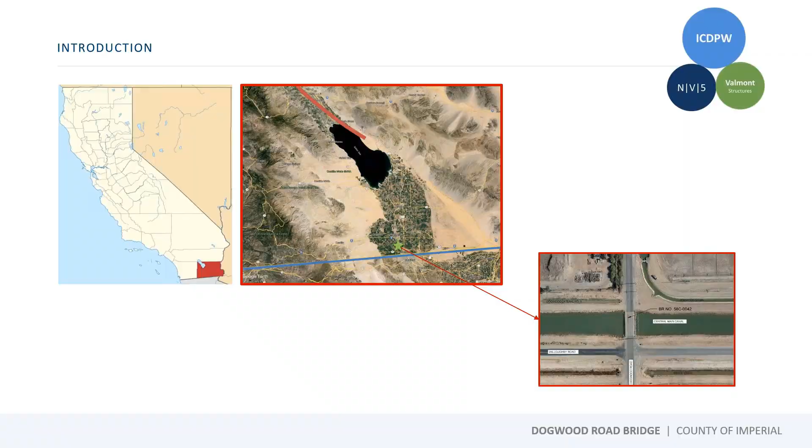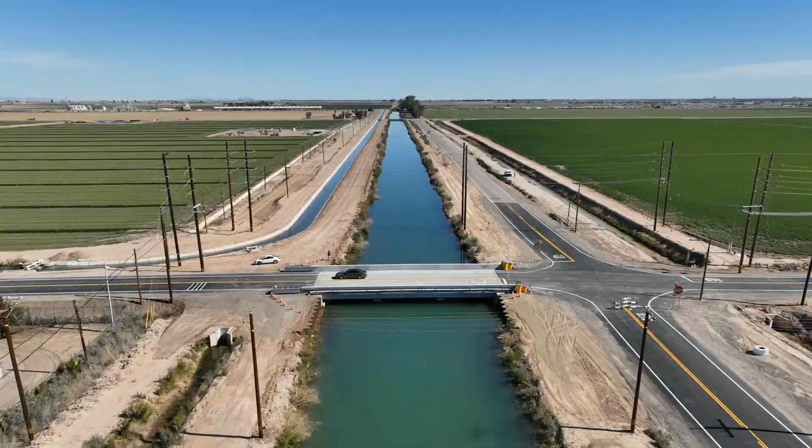You can also see a red line that bisects diagonally through our county. We actually sit at the very south end of the San Andreas Fault. We are known for our seismic activity here. An interesting fact is, I think basically 3 months after our bridge was constructed and opened, we actually had a 4.0 magnitude earthquake swarm. The epicenter was 2,000 feet just west of our bridge. So we do have a lot of dynamic activity that happens here.

Because we are a cultivated desert, we do have a lot of canal and drain systems. You can see in the photos attached, this bridge crosses one of our 4 main tributary canal systems that help cultivate our area. The canals never run dry. It's a 24/7 operation in terms of they're never taken out for maintenance reasons, and so this project requires us to work in very wet environments.

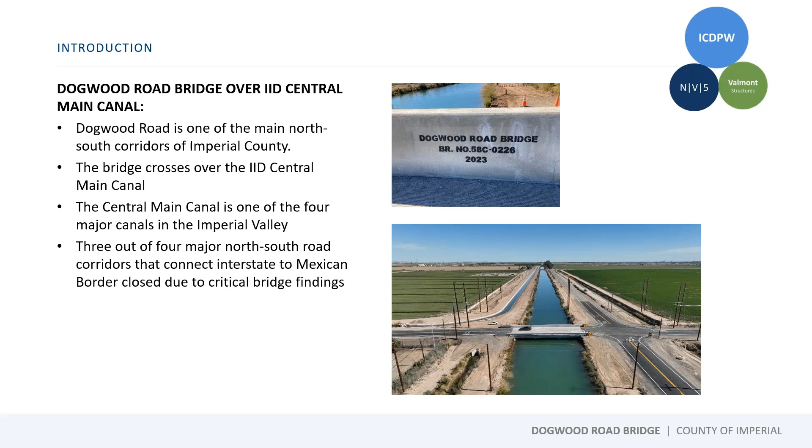The Dogwood Road corridor is a main north-south corridor that crosses the Central Main Canal. That corridor is key because it ties directly into the border with Mexico. Our project at the time was declared an emergency because 3 out of the 4 main corridors that transit to the border north-south through our county were actually closed because of bridge issues. 2 of them had critical findings at the time, and Dogwood Road was closed as well.

The issues for closure had to do with ongoing subsidence. You can see in this photo the old bridge - this area was settling, and Derek will get into that in a little more detail. Because of the settling that was occurring, because of the water that began overtopping the deck, we declared a local state of emergency and closed the bridge. There was a significant erosion issue too that was occurring at the abutments.

Some of the complicating factors around this particular project had to do with a very high density of utilities of different types. There was a gas line actually attached underneath the bridge - a high pressure gas line that served one of our cities. Overhead power lines, telecommunication, as well as the drains and canals. The closure of Dogwood Road, as well as 2 of the main corridors that led to Mexico, created a major detour issue, and so this project became front and center very quickly.

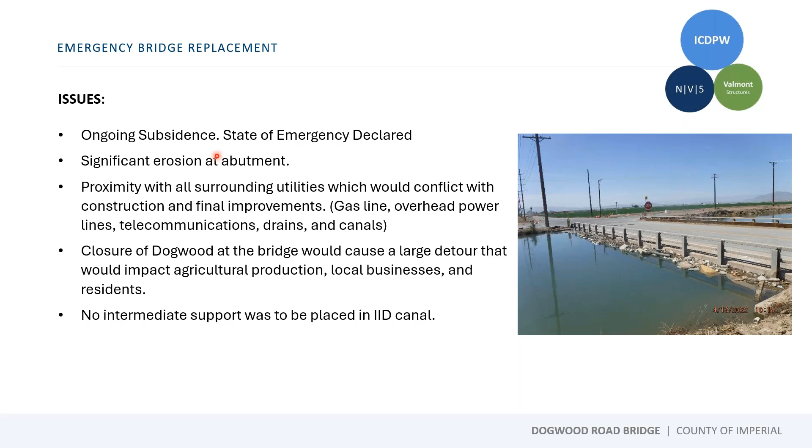The Imperial Irrigation District, the local raw water purveyor and power provider here, is referenced as IID in this particular slide. They also indicated that we were not going to be able to take the canal out at any time, or put any kind of intermediate supports within the canal system. With that, I'll hand it over to Rob.

Torad, do you have the presentation? I got it. Yeah, great. Thank you, John. Good morning, everyone. As John mentioned, this project used to be, or was, an emergency project.

There were goals associated with this project which I'd like to go through. We were supposed to design a single span bridge, mainly because IID, the irrigation district in Imperial County, did not want additional substructures built in the canal and wanted to have the water flow through at all times. We were supposed to select a lightweight superstructure in order to be able to raise the bridge in the future, because of the subsidence in the area. They wanted to minimize the bridge depth, mainly because the area is very flat, and it would not work well if you raised the profile on this roadway.

They wanted to reduce the construction time, mainly because of the emergency situation. The county wanted to open Dogwood Road as quickly as possible to minimize the economic loss or cost to the farmers and community in this area. Lastly, they wanted us to restore some of the erosion caused by migration of water adjacent to the abutments, and as part of that, provide future erosion control so that doesn't occur.

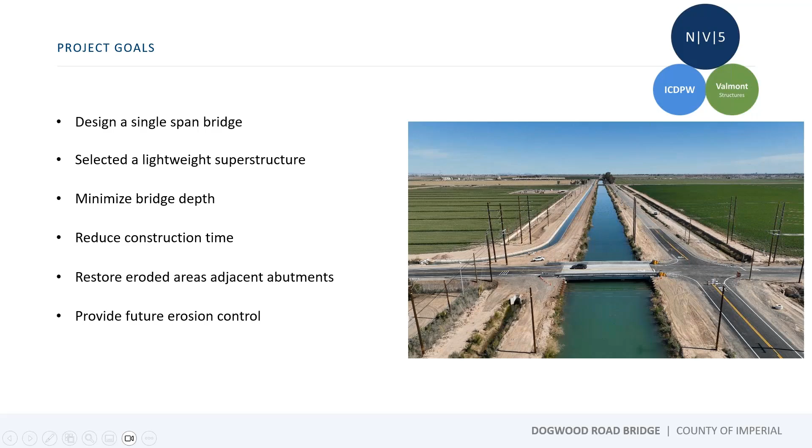So let me talk about some of the project challenges. These are some of the utilities we had to deal with. SoCal Gas had, as John mentioned, a 4-inch diameter high pressure line on the edge of the bridge, as you can see on the left photo here, and that one was under the water by the time we went to construction. They had to relocate that.

The IID had a 92 kV transmission line that had to be moved during construction, but only momentarily, so they could build the bridge. Lastly, AT&T fiber optic telecommunication lines had to be undergrounded during this project in order for us to be able to remove the bridge and reinstall the new one.

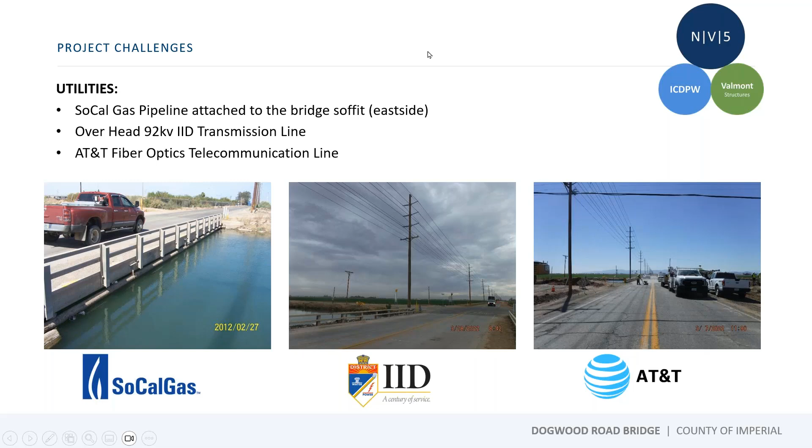Having said that, the biggest and most important challenge in this project was the fact that the area as a whole was settling. I'll get into that in more detail. The area was settling approximately an average of an inch a year. As you can see in this photo, the gas line was absolutely under the water at the time this picture was taken. We also had another drainage line on the west side of the bridge that had to be relocated as well.

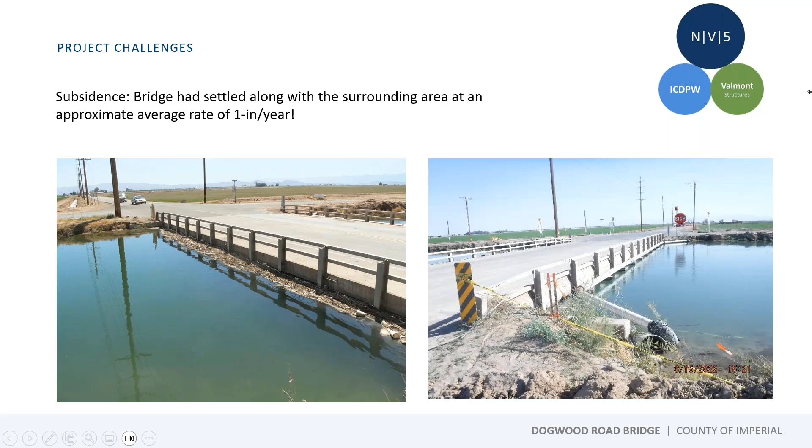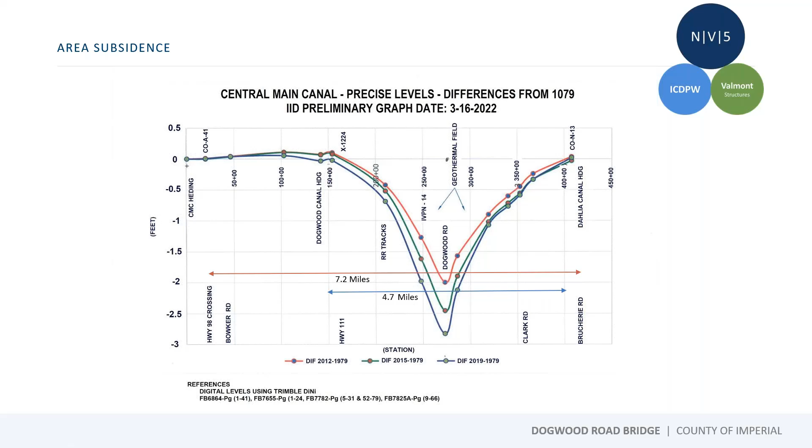So in order for us to really meet the goals that the county had, we looked at 3 different options: a precast concrete girder bridge, a prefabricated steel tub girder bridge, and a post-tension superstructure. We had to make sure that whichever option we selected met the requirements and goals of the county, meaning the final selection had a lightweight superstructure, a low depth of structure, and could be constructed really fast.

Having gone through all of that and looked at all of these different options, we ended up selecting the steel tub girder bridge because it met all those requirements.

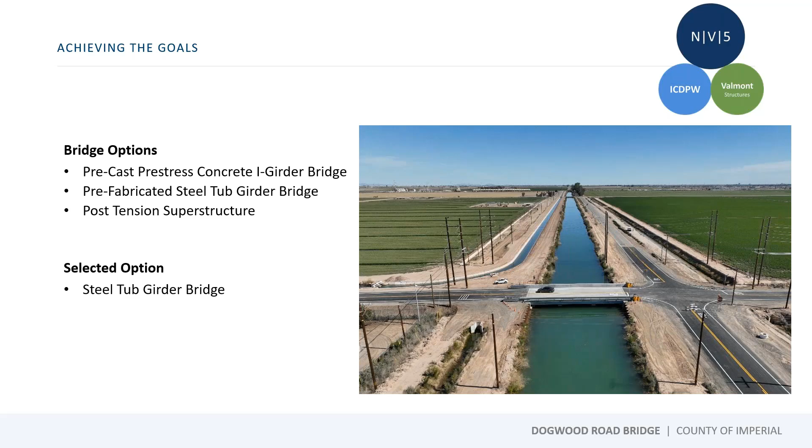Once we selected that, we worked with Valmont, who is the fabricator for the tub girders, to design the girders per the AASHTO criteria, per the design criteria shown on the screen here, for HL93 and CALTRANS P15 permit design load, and their seismic design criteria version 2.

We also wanted them to design these girders so they can be lifted. So we talked to them about adding additional plates on the bottom of the girders from each end in order to support lifting the whole superstructure in the future. We promised the county that in 20 years they can lift the superstructure, raise the abutment seats, and reinstall the superstructure in order to gain the 2 feet that will be lost in that period.

The bridge, as you can see here, also had 2 through lanes, 12-foot lanes with shoulders, curb to curb 36 feet, out to out 39'-6", with an 8-inch deck and 2-foot 6-inch girder depths.

And also we designed the abutments, which ended up with 6 30-inch diameter kiss piles. We call them kiss, but they are cast in steel shell piles, as everybody knows. So we ended up designing the abutments.

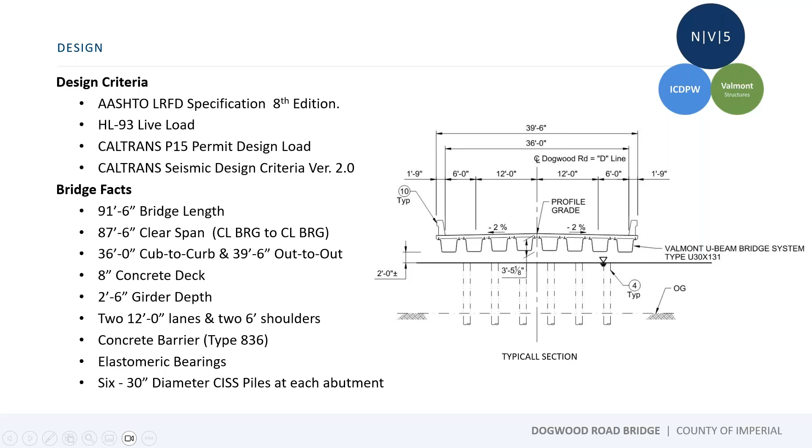Not only to meet the requirements of the county, but also to meet the requirements of regaining all the eroded areas as well as making sure we won't get erosion. We designed it to handle 8 new girders, and we stepped the abutments in order to make sure we get 2% cross slopes on the road, on the cross section of the road.

We had placed staggered piles throughout this area, and as you can see here, we ended up keeping the existing abutment, shown in gray. We drove in PS31 flat sheet piles behind the existing abutment, between the existing and the new abutment. We designed the new abutment, placed it right behind the existing one, and drove additional Z piles on either side to make sure water does not migrate behind the abutment as well as at the edges on either side.

We did run into some issues with our piles, however, through construction, those were resolved. We ended up getting water into the pile shells, and we changed the plug, up to I believe the final was about 10 feet of plug, which caused the water to stop and not come back into the shells. So that got resolved during construction.

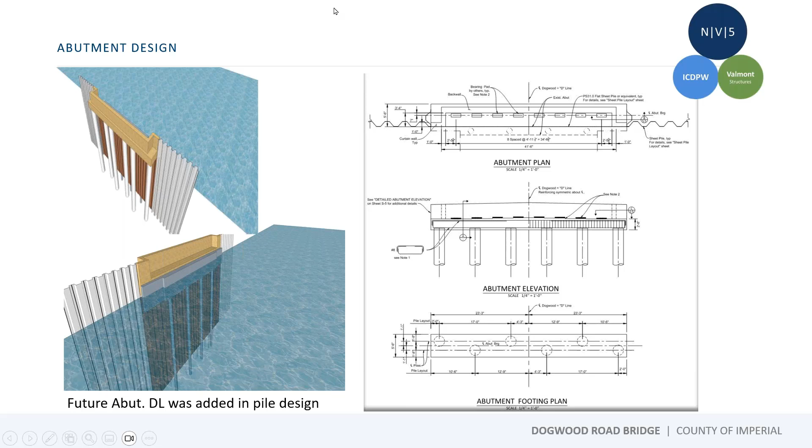Now just to mention what the sequence was through construction: one of the utility companies, the gas utility company, had not relocated their line by the time we got the girders in. We couldn't remove the deck from the bridge because they had that high gas line over the bridge deck, so we could not remove the whole entire bridge deck. They had to HDD, horizontal directional drilling, that pipe underneath the whole canal in order to relocate it.

Meanwhile, we were running out of time, so the contractor came out and, as you can see here, built mock abutments on either side, 2 mock abutments on the side of the canal. We assembled and placed the girders on those abutments, formed everything, put in the rebar, and cast individual slabs for each of these girders. Then we waited while they were curing.

The gas company finished their work, then we went back and removed the old bridge deck.

As you can see, we left the substructures, including the two piers, one of which was in the canal. Then we, one by one, moved the girders plus the precast deck back into their final location on the bridge abutments. By the way, these had an 8-inch space between each component.

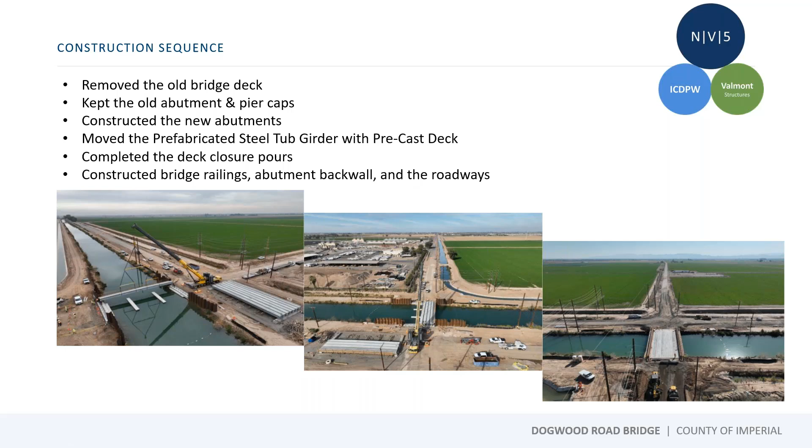For those of you who haven't been to Imperial County or this southeastern area of California, it's absolutely amazing that this can happen in the desert. The reason I left this slide is the innovation of this project really started 150 years ago, when engineers, surveyors, and geologists decided to convince the United States government to reroute the Colorado River through the Imperial Valley to irrigate this desert. John isn't kidding when he says this is an irrigated desert. If you come here, you'll drive 2 hours through brown, lifeless desert and then drive into this oasis. You can see it here in these pictures. It's absolutely amazing, I just wanted to point that out.

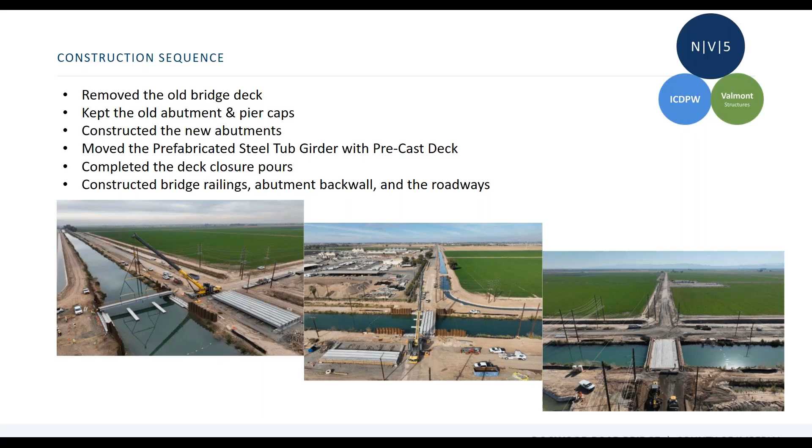So, to the project. I mentioned the innovation done 150 years ago—well, Valmont is also an innovator in the agricultural irrigation system. Valmont started with their own center pivot irrigation system, and to build that system they needed to fabricate steel. This started in 1946 with Valmont Industries, and they grew into a worldwide steel fabricator, now fabricating steel throughout the United States as an AISC intermediate bridge-certified steel fabricator delivering bridge products nationwide. For this project, we delivered our press brake form tub girders, or as we like to call them, our U-beams—a little easier to say than press brake form tub girders.

We have 5 different shaped tub girders, ranging in spans from our shallowest, the U12, which can get out to 40 feet long, all the way up to our deepest, the U33, which can span a full 100-foot single span under AASHTO HL93 loading. The press brake tub girder is a product brought to us by the Short Span Steel Bridge Alliance, and I'll talk about that in the rest of the presentation.

So, if you don't know what a press brake tub girder is, it's been around for about 20 years now. The first project was installed in Monroe County, Michigan in 2004. It's been researched by Michigan State University, Iowa State University, and Marshall University, so there's been a lot of research done.

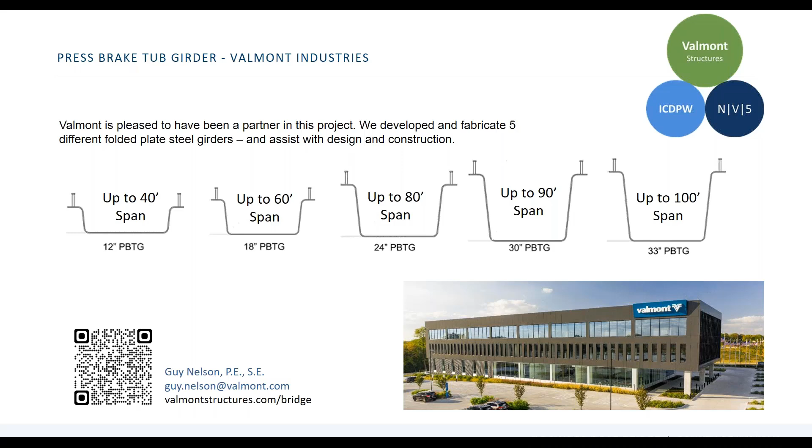Basically, a press brake tub girder, as Iowa State University defines it, is simply a flat piece of AASHTO M270 plate—flat steel plate made in the USA—bent into a structural shape. That structural shape is what AASHTO would call a steel box section. All the fabrication procedures and design follow the AASHTO bridge specifications. There have now been over 100 bridges installed throughout the United States, with this being the first installation in California.

AASHTO has also recognized this product, the press brake tub girder, with an AASHTO Innovation Initiative Award back in 2020, where it was deemed a ready-to-implement technology. We were also awarded a Focus Technology the year after. And last year, Missouri DOT, Pennsylvania DOT, Michigan DOT, and myself gave an AASHTO AII presentation about the press brake tub girder technology.

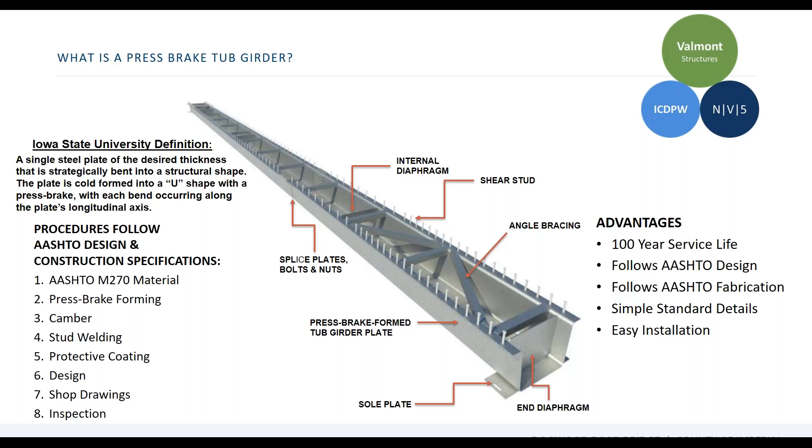So, what is a press brake tub girder and how do I design it? Well, that's a great question. If you really want to know, I recommend going to the Short Span Steel Bridge Alliance website, shortspansteelbridge.org. There you'll find a 7-volume research report published by the Alliance, including full-scale testing, full-scale example projects, fatigue testing, live load distribution factor verification, and complete AASHTO design procedures, which are shown here.

Basically, a press brake tub girder is a term coined by the Short Span Steel Bridge Alliance, but essentially it is an AASHTO steel box section. It's as simple as that.

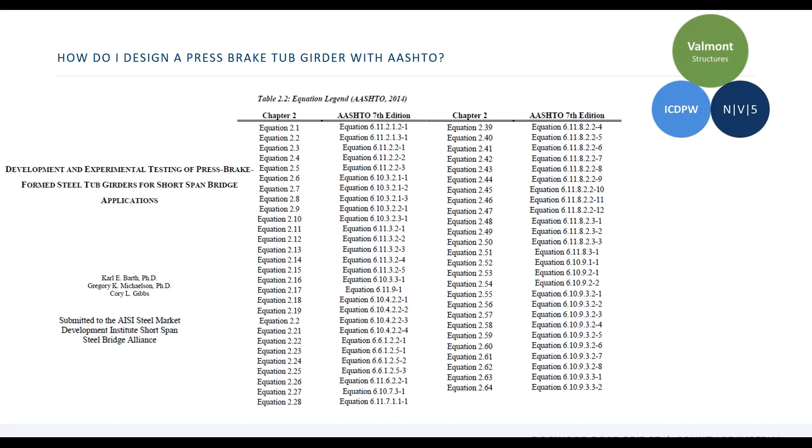In this manual, you'll learn how the press brake formed tub girders were developed through the Short Span Steel Bridge Alliance. There are 5 standard shapes that were developed through an efficiencies study. Why 5 shapes? Because if you buy steel plate from the mill, there are basically 5 standard rolling widths from the mills: 6-foot, 7-foot, 8-foot, 9-foot, and 10-foot plate.

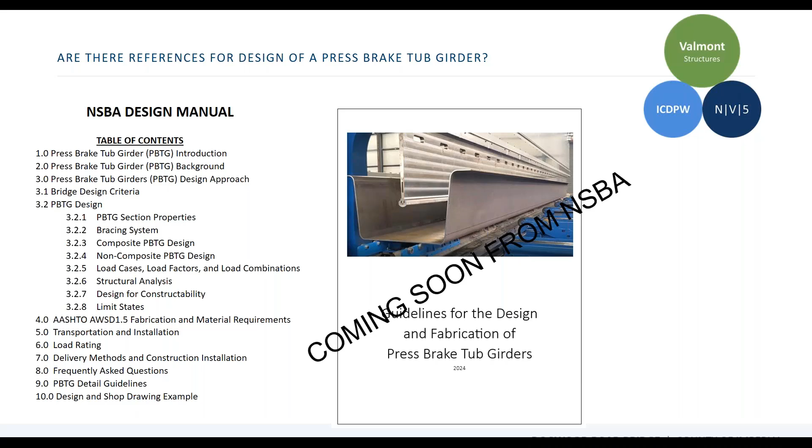So you can see here, the U12 is fabricated from a 72-inch wide steel plate, all the way up to the U33, which is fabricated from a 10-foot, or 120-inch wide, steel plate. We want to use as much of that flat plate as we can in our press brake and not waste any of the steel that comes off the mill roll.

With these 5 shapes, we've also developed what we call our beam selection chart. With this chart, you can get some preliminary sizing. If you're starting a job or doing a study, probably what NV5 did to start this job was get an idea of, say, at a 75-foot span, what sizes and what spacing should I use for a press brake tub girder?

For that 75 feet, you can go with the most efficient section, which would be 33 inches deep at 8-foot spacing, if you want the cheapest option. Or if under-clearance is an issue, like it was on this job, or you want additional hydraulic capacity underneath your bridge, you could go with the smallest beam, a U24, for the 75-foot span, but you'd use about twice as many beams. Depending on your situation, you might need that.

All these beams in this chart meet AASHTO loading, HL93 loading. They also meet the live load deflection requirements of L over 800. You'll notice that a lot of these are actually shallower — AASHTO recommends a minimum beam depth of about L over 30, but on this chart, a lot of these can be used at L over 40 and still meet that live load deflection requirement, which is a reason why this product was so beneficial on this project.

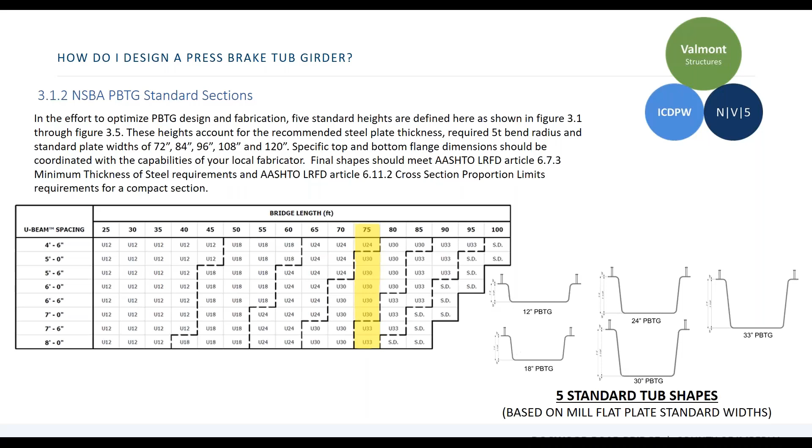It's a little deceiving — the existing piers were left in place, but we did not use those existing piers to support the new bridge. We had to, again, do as governed by the IID. I found out through this project, the IID, as I'm from the East Coast, is kind of like the railroads are on the East Coast — it's their property, and they dictate what needs to be done on their property. They said we're going to span the full 90-foot canal width, and they didn't want any contractors in their canal during construction.

So it was a superstructure removal, but we basically replaced an entire bridge around that existing substructure. Part of it also was that NV5 had to allow for about 2 feet of freeboard underneath the bridge to the existing water elevation. As you saw from the pictures earlier, that existing bridge had already settled and was restricting flow of the canal, so we had to raise the bridge up 2 feet. We had to span 90 feet — the old spans were only 30 feet — and NV5 had to tie it into the adjacent access roadways right off the approaches.

So it was very critical for NV5 to have a very shallow depth system. Otherwise, they would have pushed the approach work into 4 different roadways coming off of this bridge.

Through the study, they chose the U30 press brake tub girder, about 30 inches deep, over 90 feet long. So you're still looking at that less than L over 30 beam depth, span to depth ratio. But we need that very shallow depth to keep the raise in elevation as small as possible.

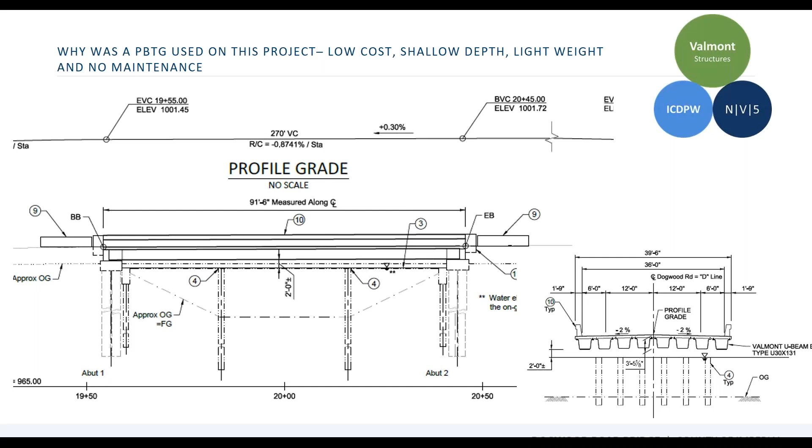Also, that helps inspection. If you have no fatigue critical details in tension zones, what are you inspecting? Really, you're just looking at the thickness of the plate. And if plate thickness is all you're concerned with, then a very durable coating system is what you want. That's what Imperial County chose for this project.

They chose to use a hot dip galvanized coating rather than an uncoated weathering steel system or a 3-coat paint system. Why? As you saw in those pictures Darb showed earlier, it'd be very difficult to come back and do any kind of maintenance to these beams with that very shallow underclearance to the water level. So they wanted a coating that would last a very long time, maintenance free. That's what galvanizing gives you.

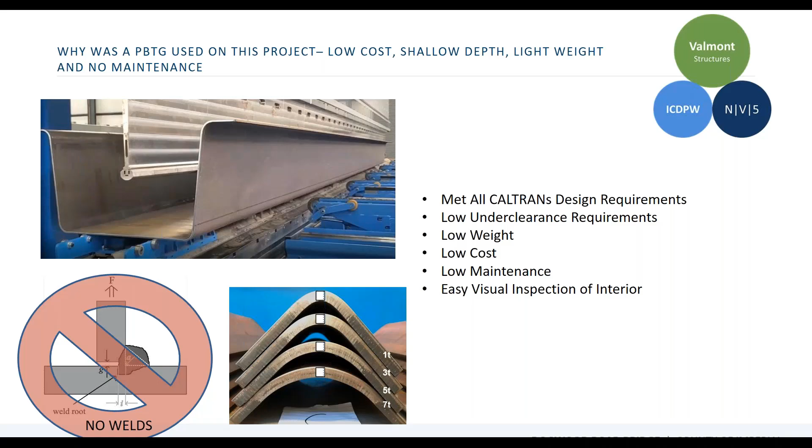I'm out of Michigan, and there's a project here locally that was galvanized back in 1966. Valmont is also a coatings company, we also galvanize, and we went back out and inspected that bridge just a few years ago. It's 60 years old with no maintenance. We determined the bridge still had about 2.7 mils of coating thickness left, giving it another 40 years of maintenance-free service life. Galvanizing has been proven to be a very long, durable, maintenance-free coating protection, and that's why Imperial County chose it for this project.

So we get into the fabrication of these beams. We've got the order from the county. NV5 chose to use press brake tub girders, it went out for bid, and Valmont was chosen to provide the press brake tub girders to the county.

Valmont produces our beams in Jasper, Tennessee. So one might think, Jasper, Tennessee, why? How could it be economical to bring beams all the way from Tennessee to California? I just want to remind everybody that for the AASHTO M270 plate, most of that is built right here in the Rust Belt of the United States.

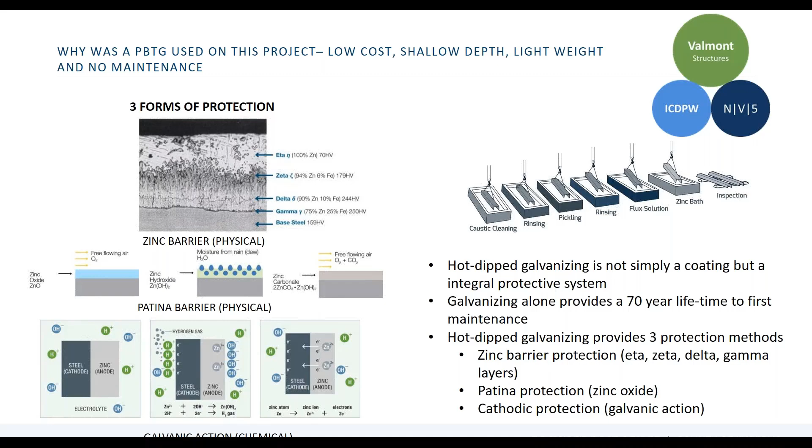One way or another, the steel that gets to California is coming from one of three sources: either SSAB out of Iowa and Alabama, Nucor who has a brand new plant in Brandenburg, Kentucky, plus plants in Alabama and Hertford, or Cleveland Cliffs, out of Pittsburgh, Pennsylvania. So that steel is coming from one of those sources one way or another.

What we found is we can ship as many as 6 press brake tub girders, after they are fully fabricated, on a standard size trailer anywhere we want without any permits.

They're not overweight, they're not oversized. Whereas if you're shipping around that flat plate, we produce it out of flat plate that is up to 10 foot wide, which costs a lot more money, especially on these U33s that required a 10 foot wide flat plate. It's a lot more efficient to ship the flat plate to a close location where we can fabricate it, then ship the fabricated tub girders to the final delivery.

I also wanted to mention that these beams being 90 feet long, there are no press brakes that long, so you have to fabricate them in pieces. There are many fabricators out there with press brakes. The longest Valmont has is a 60 foot long press brake that yields a 58 foot long single piece. So for this single span application, we fabricated each beam assembly in 3 pieces.

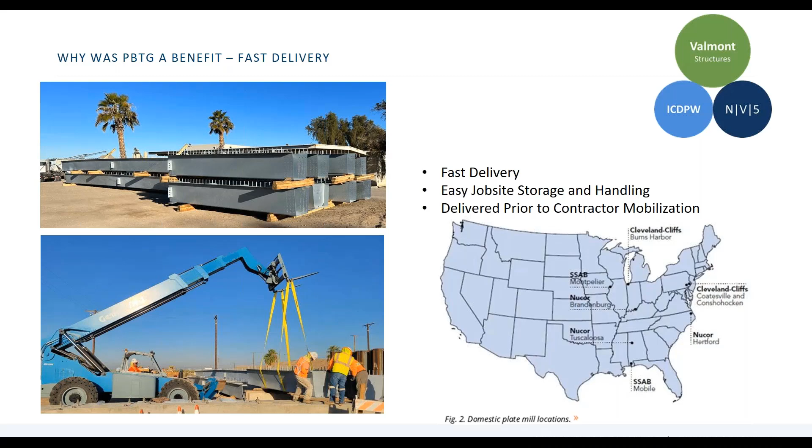So basically, they changed this project from a normal project to an ABC project during the project, which is pretty innovative in itself. The contractor chose to redesign these beams through Valmont. They asked Valmont if that was possible, and with the help of NV5, they redesigned the beams to be a PBU units type installation.

And basically got back the 4 weeks through ABC construction that they lost for the utility relocation. So another aspect that made press brake tub girders the choice for NV5 was the future jacking of this superstructure product. If you see here, there were jacking plates installed about 10 feet from the abutments.

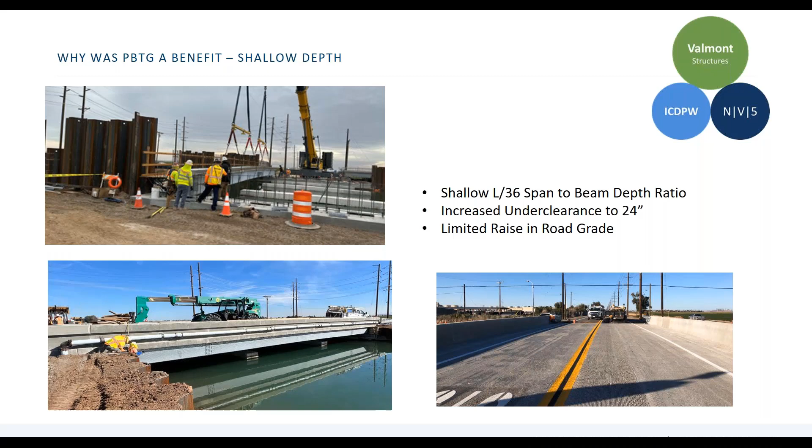So why was that so critical for press brake tub girders, or really just steel in general? If you think about a pre-stressed concrete beam or a post-tension concrete slab, you would have to do the pre-stressing or post-tensioning for the full 90-foot span, but also make sure it would work for the jacked span of about 70 feet, which plays with your top and bottom concrete stresses.

With the press brake tub girders, we simply put a jacking plate underneath the beam. We put a bearing diaphragm right above that sole plate to jack up, and then we also positioned an inspection hatch port right between the internal bearing plate and the bolted splice, so that in the future you could easily look inside of your beam and make sure there's no deterioration happening around those splices or at your bearing stiffener.

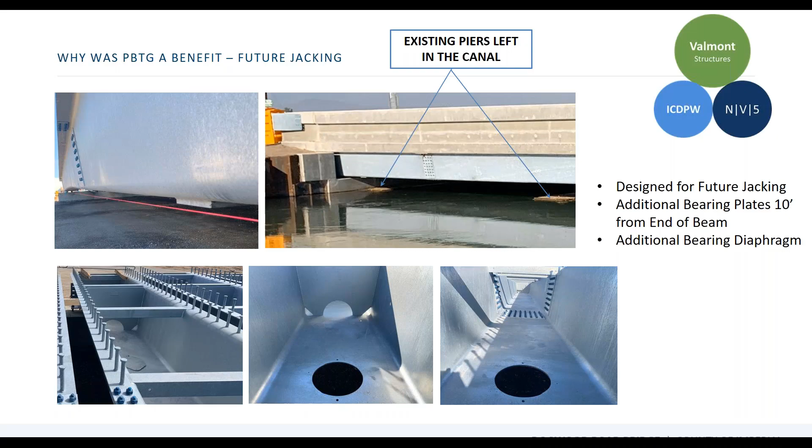Again, the things that came up that we didn't know about show the benefit to the versatility of a press brake tub girder. On the fly, the contractor, working very closely with the county, NV5, and Valmont, changed this around from being a cast-in-place bridge to precasting those concrete sections on the job site and lifting them into place. NV5 then designed a 9-inch wide closure pour using standard CALTRANS concrete. So very innovative design. It took the whole team to do this. I want to give kudos to everybody involved, because there were a lot of things moving on the fly to make this project a success.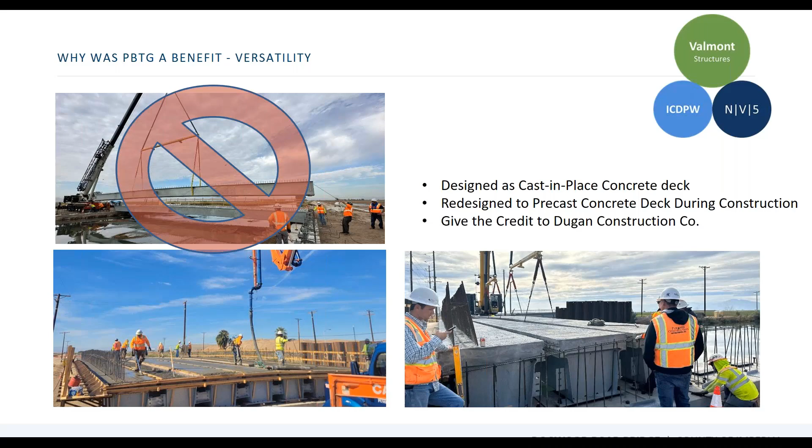So what else in California has been done since the installation of this? Well, about 6 months later, we installed another bridge, basically a mirror image of the Dogwood Road Bridge, about a half-mile down canal on Clark Road. That one was done with a cast-in-place bridge deck. The same contractors that installed the first bridge were awarded this project, and instead of doing it the precast way, they did it with the as-designed cast-in-place method. Additionally, we did a project in Chico, California, where press brake tub girders were fitted up in the field with full-depth precast concrete panels, grouted in the field to make them composite, and then the whole thing overlaid with an epoxy overlay after the grout cured.

And then what's in the future? What does the future hold? CALTRANS is looking at doing 2 bridge replacements on CA-99. We're expected to do 1 this year, 1 next year, utilizing PBU units and precast foundations. They want to replace these 2 bridges in a week closure only. Very cool. Hopefully, we'll be able to do a presentation in the future on that future ABC project with CALTRANS.

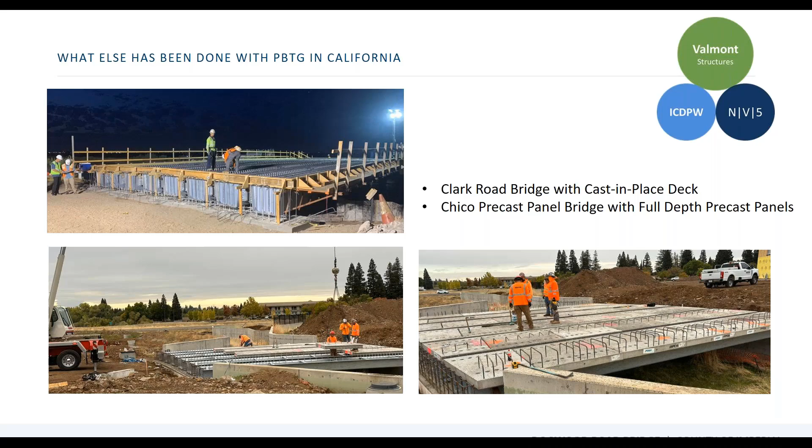And lastly, I wanted to mention the Dogwood Road Bridge received an outstanding structural engineering award through ASCE San Diego, and we received those awards just earlier this summer. We're also receiving an award from the Association of Public Works, the American Public Works Association, APWA, for that same project. So a lot has been done, and it's all due to the team of all 5 of us, the 2 contractors, Valmont, NV5, and the county, all working together to make this successful.

So with that, I'd like to hand it back off to John. Thank you, Guy. We are very appreciative of being able to present our project today. It was a very rewarding project. Actually, half of my team is getting the APWA award today. So we look forward to your questions, and we thank you for the ability to be able to showcase this project.

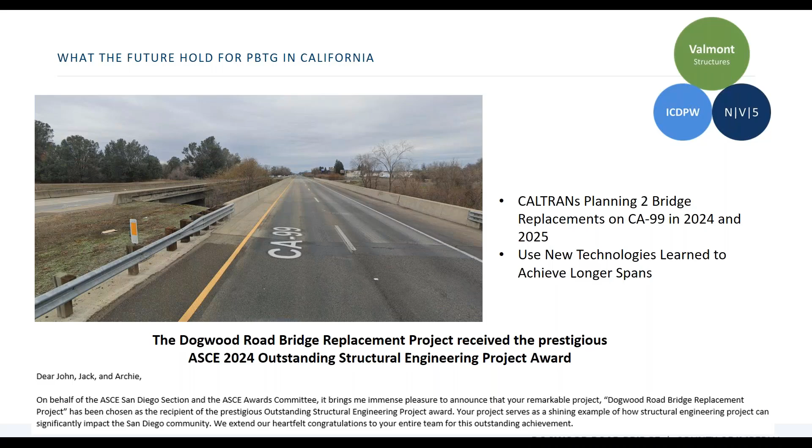The questions, I'll start off with the ones that came in earlier. The first one is, what is the length for a single span press brake tub girder? This one was 90 feet. We can efficiently go as short as 30-foot spans with our U12, all the way up with HL93 loading to that 100-foot span. I also want to mention this project required the permit loading of the California P15 truck, which we had to design for in the design stage. That's a 500,000 pound truck with dual axles of 54,000 pounds. So we can handle big loads, and we can go out to about 100-foot spans.

Then what was the maximum span you could use without splicing the girder? There are a lot of fabricators that can fabricate these. Valmont is not the only fabricator, but Valmont has the limitation of 58 feet. Why 58 feet? Because that's what our press brake can do, but also we're a coatings company, so that is also our largest tank that we can actually do hot dip galvanizing in.

Is there camber in the press brake tub girders for this bridge?

Absolutely. That was one of the things that came up. When they switched the design from cast in place over the canal to precast fully supported, we had to look at what the changes to the beams were, since they were already fabricated and we already had the camber in it based on a cast in place dead load on top of the beam. We had to investigate how much that camber would change if the contractor actually precast it on. We gave those numbers to Darab and NV5, and they evaluated them and determined those still meet the tolerances for the profile of the roadway.